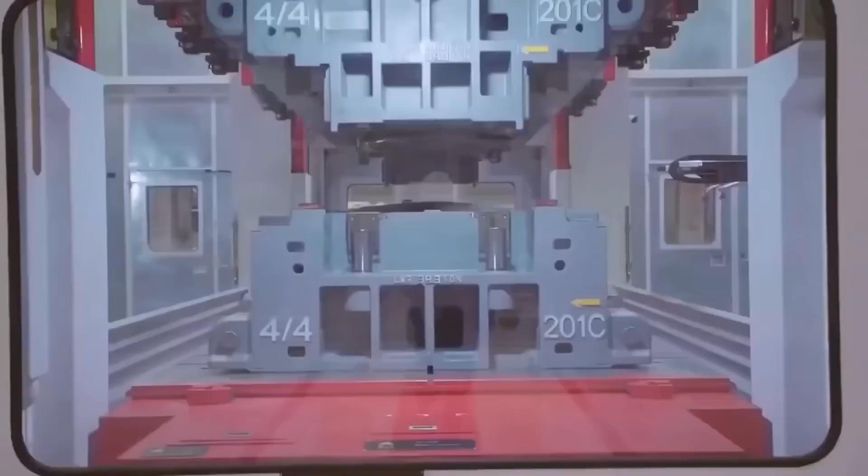He never settles for a limited focus, and that's evident from the incredible projects he and his team have accomplished so far. The Tesla boss, along with the talented engineers and designers at the company, always strives to think big and achieve greatness.

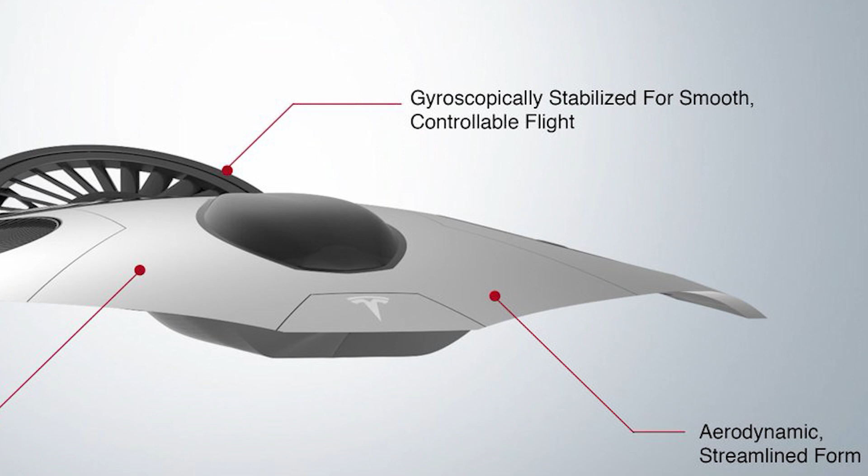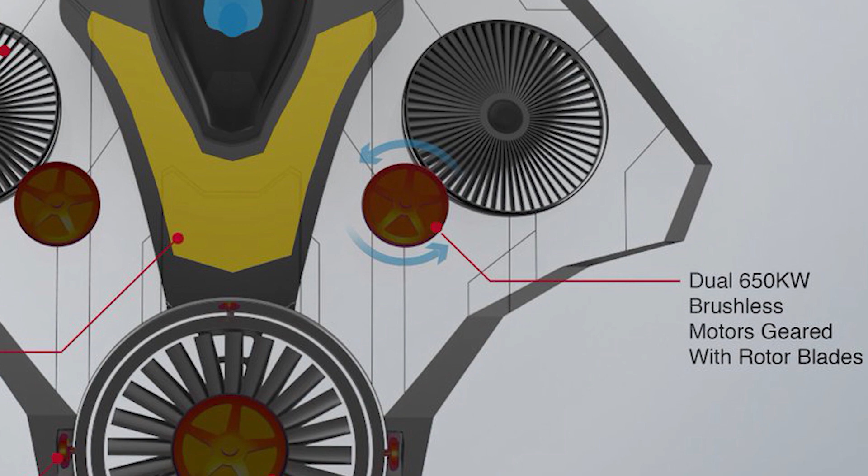To ensure stability in flight, the aircraft is gyroscopically stabilized. The Model V has 3 lithium-ion battery-powered motors, including a 1250 kilowatt motor and dual 650 kilowatt brushless motors, which are geared with rotor blades to enable the distributed electric propulsion required for flight. This means that if one part of the aircraft were to fail, it would still be able to land safely. Finally, the Model V has retractable landing gear cleverly hidden under a carbon fiber underbody on the aircraft's exterior.

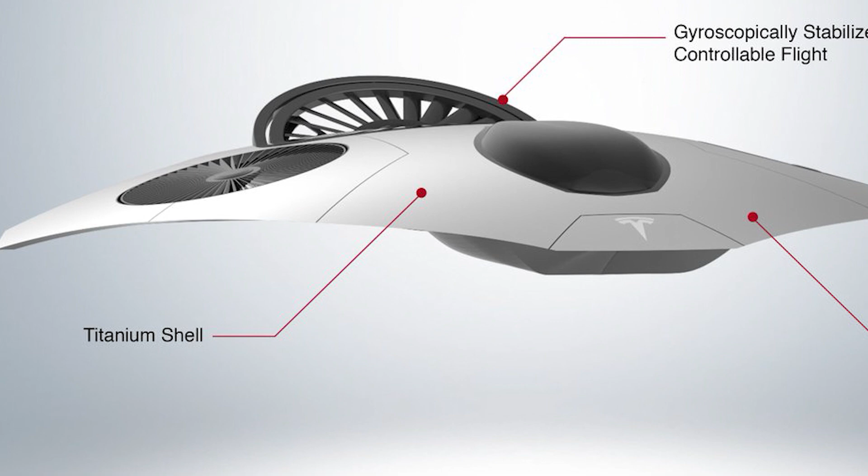Abbott Davies had hoped to secure an internship at Tesla and included the Model V design in his application. Unfortunately, he didn't get the internship and ended up working as an industrial designer for an eVTOL, or hybrid electric VTOL, manufacturer. It's worth noting that other companies are also keen on developing electric aircraft.

In 2017, Eviation presented its Alice aircraft prototype, which garnered more attention than Tesla. Alice was the first all-electric plane that could be used commercially, with a range of up to 600 miles and the capacity to transport 9 passengers. These features make Alice a viable option for some short-haul regional airlines. Eviation subsequently launched manufactured copies of Alice, which came with a range downgrade but are still useful for certain routes.

Eviation's plans to launch its Alice aircraft commercially have hit a snag due to the certification process, and it may not be ready for commercial use until 2024. However, it's not the only company in the game.

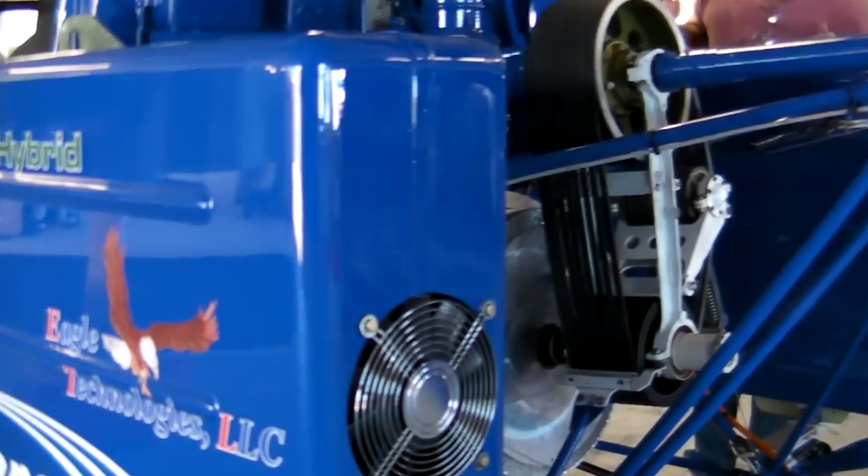Lockheed Martin's Sikorsky is also working on electric aircraft, having replaced the engines of a Sikorsky 300C helicopter with an electric motor and lithium-ion batteries to create the world's first fully electric helicopter, the Firefly. Although the battery life is limited, the blades can still auto-rotate, allowing the pilot to land safely if the battery runs out of power.

Meanwhile, a designer named Antonio Paglia has come up with a Tesla helicopter design that represents the company's values. Despite being focused on supersonic electric VTOL, Tesla has yet to show interest in building electric helicopters, but the concept remains interesting.

According to Antonio Paglia, the Tesla helicopter is not something that the company is actively working on at the moment. He believes Tesla will only consider developing a helicopter when they have advanced battery technology that can efficiently power flying machines. The goal of designing the future flying machine is to improve efficiency and speed, and Antonio envisions the Tesla helicopter being used for safety and patrol purposes.

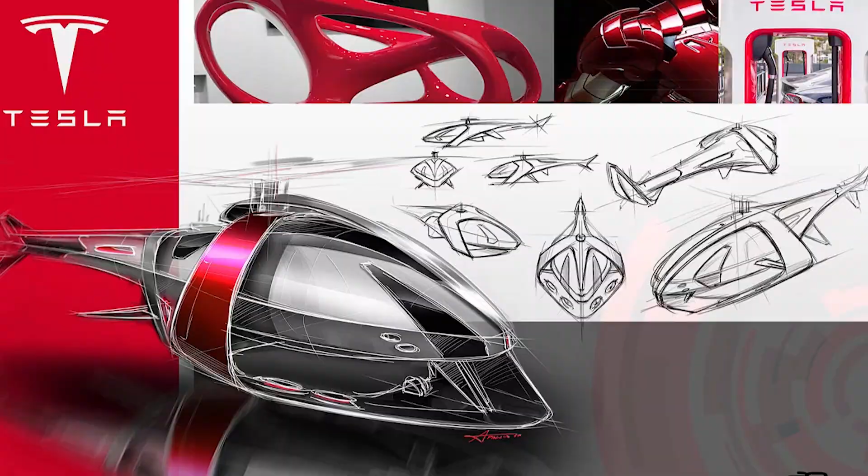Its advanced technology could be a game changer for air and ground patrol operations, making them more effective and cost-efficient. The Tesla helicopter features a 5-bladed rotor, which is unique compared to most helicopters with 2 or 3-bladed rotors. This design will allow the helicopter to achieve lift force smoothly and minimize turbulence during takeoff and landing. The design is truly innovative, with its exoskeleton-like structure providing stability, and the small fins on either side of the aircraft serving the same purpose. Additionally, the 5-bladed rotor system enables a smoother ascent and descent, reducing turbulence.

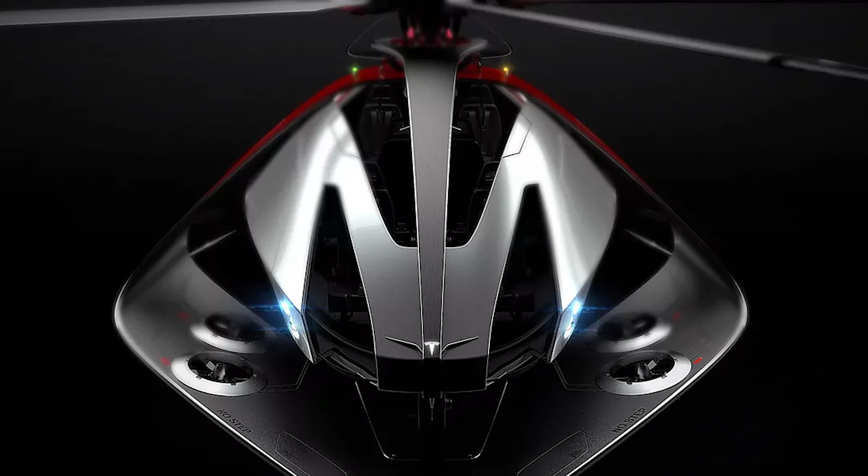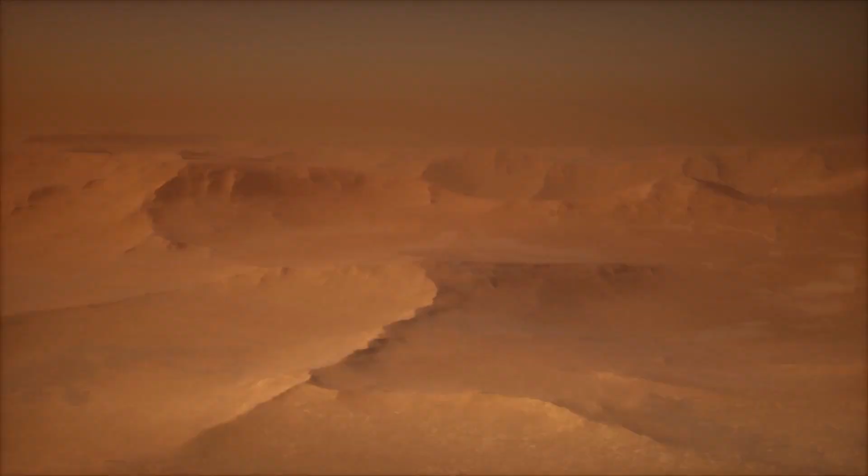Interestingly, the cockpit is completely enclosed, but it's unclear whether this is an oversight on the part of the designer or a deliberate choice. It's possible that Tesla may add functionality to switch a covering or shield on top of the cockpit, allowing the pilot to switch from a direct view to a video-connected view during extreme weather conditions like snowstorms, sandstorms, or heavy rain. Unfortunately, Tesla hasn't yet commented on or confirmed anything about this design concept.